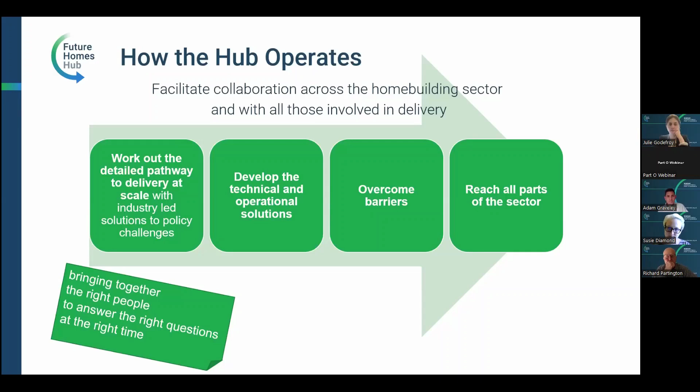The webinar today is an example of how we've done that. We're reaching out now to the sector, and I want to acknowledge not only the speakers today, who are experts in the field of overheating and really pulled together the guidance over the last several months, but also the steering group behind them, supported by our sponsors, Velux, the Mineral Products Association, and the NHBC Foundation, who make this possible.

Also to introduce our speakers: firstly you'll hear from Susie Diamond. She was the lead author for CIBSE TM59, the methodology for overheating risk in homes, and also the Good Homes Alliance overheating risk tool, which is going to be updated, launching next week I think. She'll go through some of the technical and compliance aspects and introduce the guidance we've put out there, to help you understand what it is and how to best use it.

Next speaking will be Richard Partington from Studio Partington. Richard's been working on low energy design practice, research and policy work for the last 10 years. Previously also a member of the Zero Carbon Hub, he was on the steering group for this Future Homes Hub Part O project. Richard will look at some of the more practical design aspects and what the impacts on new homes are likely to be.

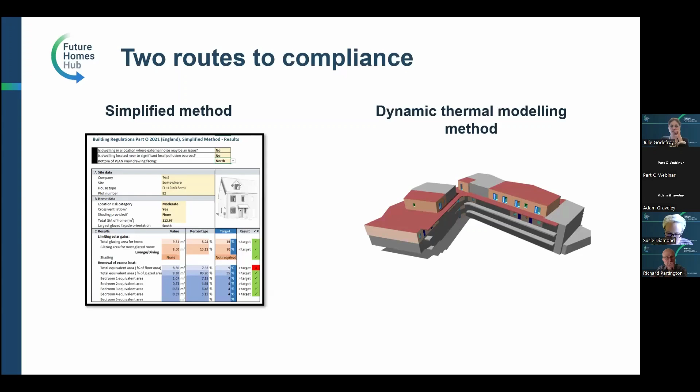Key things to bear in mind, also to think about right from the get-go: there are some key recommendations around designing to mitigate overheating risk, to make sure that's brought down to a manageable level. One of the key things in regards to Part O is to bear it in mind early. There are a lot of considerations that it will have a bearing on, that if you don't look at early and understand and make sure you're compliant with, could mean return to planning.

A lot of these things will affect the facade, so what a building looks like in terms of glazing areas in particular and window configurations. If those aren't taken into consideration really early on, it could cause you a lot of pain further down the road. Our best advice is to test archetypes as soon as possible. So if you've got some standard house types that you build regularly, have a look at those, make sure they comply, and think about what you might do if they don't in certain situations, in higher noise areas or warmer parts of the country.

Think really hard about maximising the opportunity for dual aspect ventilation. There's all sorts of positive reasons why that is a big one in terms of limiting and reducing overheating risk, from the fact that it enables cross ventilation and a much greater potential for ventilation through a property than having the windows all on one side. We know single aspect is a really high risk, again because you don't get the cross ventilation and because you're receiving all the solar gain at the same time of day. So that boosts it at that time of day, and that triggers overheating risk.

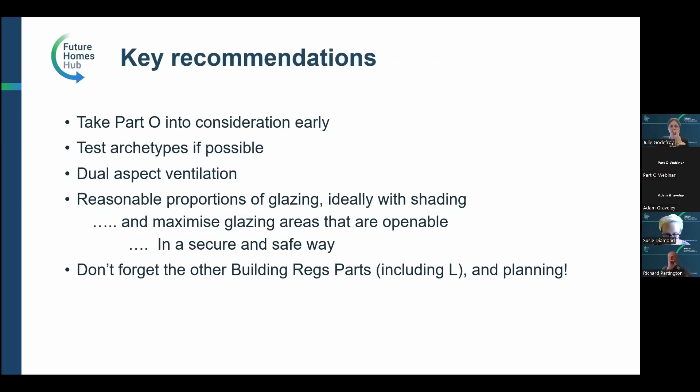So this is what we're going to cover in terms of the technical guidance. This is the main contents that the technical guide includes, starting with the overview.

As I said, the key things: there is a simplified and dynamic thermal modelling route that assesses the overheating risk itself. But on top of that, there are criteria around nighttime noise, security and safety, including falling and entrapment, which have to be addressed regardless of which route you're following. We've got more slides ahead on those, and it's really important that you're aware they apply no matter what other route you're following—they are requirements that you need to meet.

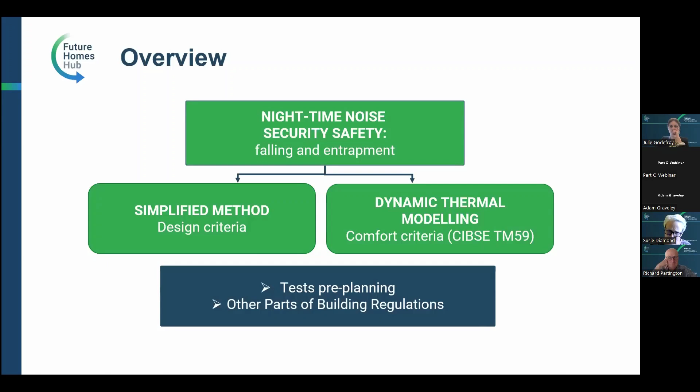Then, thinking about the timeline, the technical guidance covers this in a lot more detail. Pre-project, at an early stage, think about testing standard units, having a think about how they perform, building a library of preferred solutions so that you know what you might go to as soon as there is some non-compliance showing up, and how you might prioritise depending on the severity of that issue.

As soon as you've selected a site, it's highly recommended that you seek advice from an acoustic consultant. If nighttime noise exceeds the criteria within Approved Document O, there are implications, quite significant potentially, depending on how noisy and how much that exceedance is. It's really important you know about it as soon as possible so that you can address it and do something appropriate.

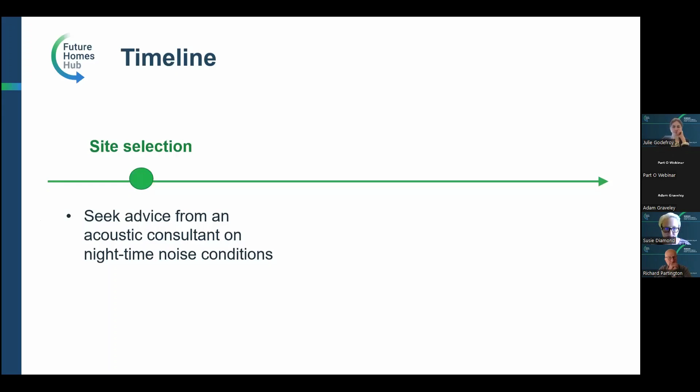Thinking about early stage design up to the planning application, make sure that you've identified whatever passive design opportunities there might be, and that you've agreed the key design principles you want to follow. Agree the design of openings and other features so that they're all settled pre-planning and that they comply with the Part O assessment.

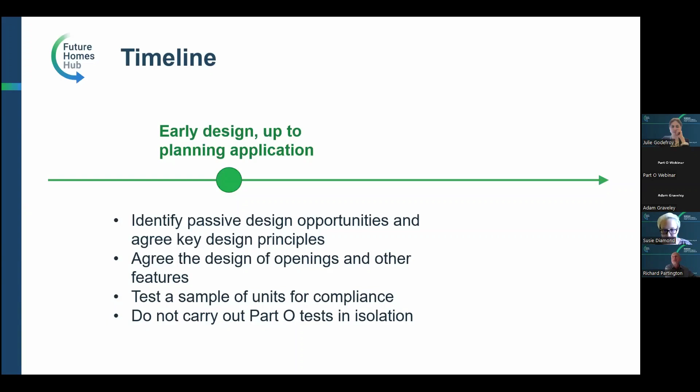You want to make sure that you test at least a good sample of units pre-planning to make sure that they're complying and that you've picked out the ones that are likely to be the worst case, so there are no horrible surprises later down the line. And make sure you're not carrying those out in isolation - that the same criteria are used in Part L and F and other assessments you're doing, so there's consistency.

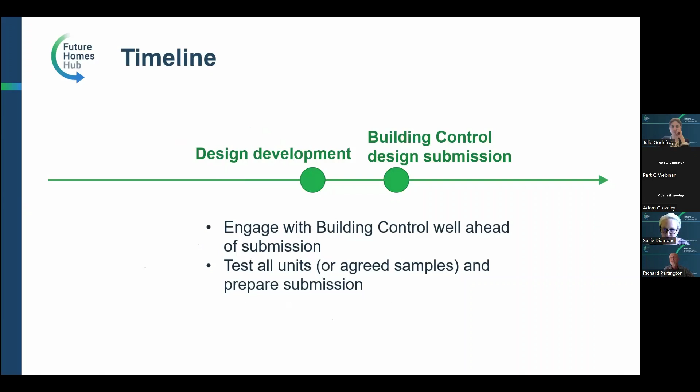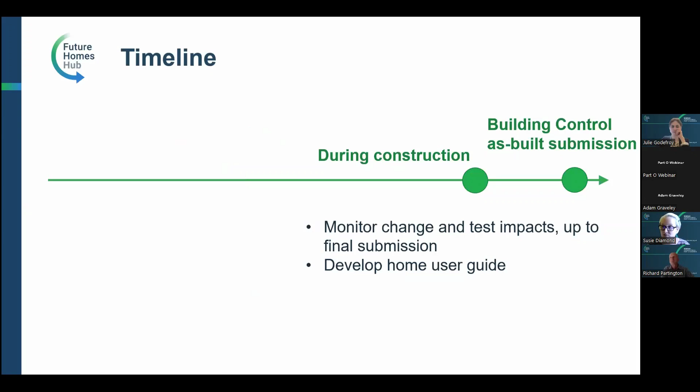Moving on to design development: engage with building control well ahead of submission, checking that they're happy with your approach, the agreed sample you've selected, and the type of submission you're preparing. Then during construction and build, just monitor for any change in tests that could impact on the final submission, making sure everything's still on target. Plus develop the home user guide and any particular information the home users will need to know about how the home is designed to cope in warmer conditions.

Right, I know I'm gabbling, but there's quite a lot to get through. So moving on to the additional Part O requirements - these are outside of the overheating check itself, but are really pertinent and you need to be aware of them. There are noise limits set for bedrooms at night.

I'm not an acoustician, but I understand that those decibel levels are not especially high, so a lot of sites will exceed those criteria. One looks at an averaged rate over the nighttime, and the other looks at peak noise events, requiring that they don't exceed 45 decibels more than 10 times in a night. What I understand is that even just being near a fairly busy road will exceed that - not necessarily being right by a train track or an airport or something we traditionally understand as big noise.

So I think we're going to see a lot more acoustic advice sought. The good news is that the Association of Noise Consultants and the IOA have together written some really helpful guidance to their community, so acousticians are getting up to speed on what is required for this, and it should be fairly straightforward to procure an assessment.

Passive solutions are often still possible if those bedroom nighttime noise levels are exceeded. It depends how much they're exceeded by, how much is possible passively. If those exceedances are more significant, then it's likely that you may need to close all the windows tightly at night and move to mechanical ventilation or cooling solutions. However, it's important to notice that's at night, not necessarily during the day. And unless there's another planning issue that prevents the use of opening windows during the day, it's still feasible within Part O to use open windows during the day and then an alternative solution at night to address the noise criteria.

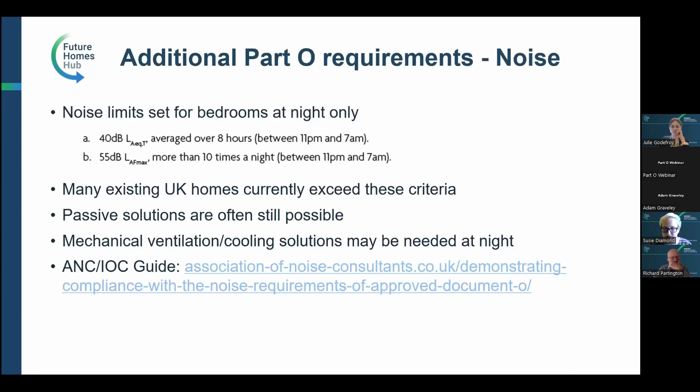I think it is a real benefit to occupants if you live on the ground floor to be able to feel comfortable leaving your windows open at night when you're sleeping. It's obviously a lot more pleasant, and obviously alarming if you don't feel safe in that scenario. So I think this is a positive, but there will be some challenges around achieving that in some circumstances.

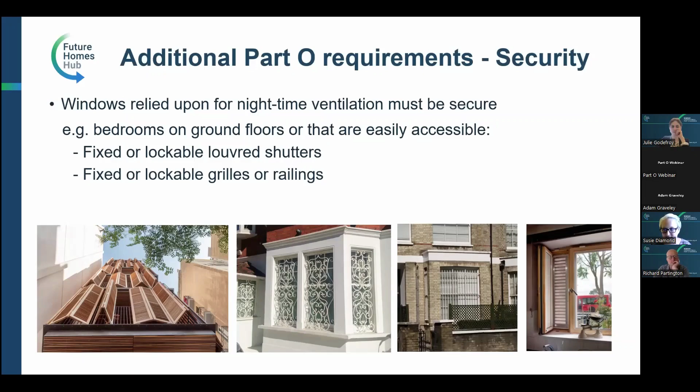An additional key requirement is the protection from falling and safety requirements. Now these supersede those in Part K, they're additional requirements, and they set out a maximum reach on opening windows of 650 millimeters from the inside face of the internal wall. So that's not a limit on how wide windows are able to open, but it's a limit on how wide you can take account of them being open in the Part O calculation.

And that's quite a subtle distinction, I know, but it means you don't have to put limiters, for example, that prevent them opening more than 650 mils, but you can't take account of any ventilation that is produced if they're wider open than that. So the good news is that the rather magic spreadsheet that has been prepared by the Future Homes Hub will take account of that and make sure that that limit isn't exceeded.

The other one is on sill heights, and the requirement is that sill heights should be higher than 1100 millimeters. That means that restrictors shouldn't be required because the sills are higher than people can fall out of. But we're also conscious that there is a maximum sill height for windows that are a means of escape of 1100 millimeters. So there has been a small tolerance of 100 mils below the 1100 in Part O. This is all explained in the guidance, I promise you.

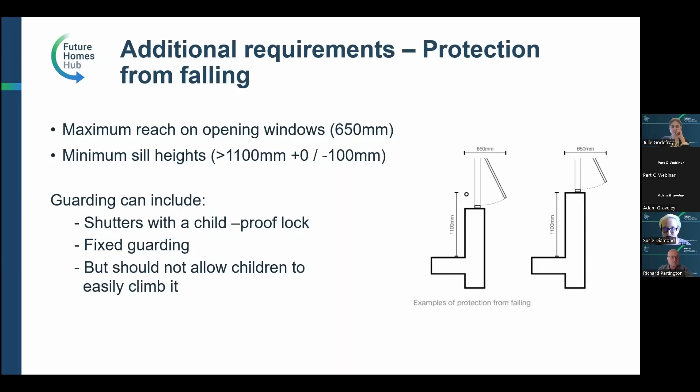I know it's fiddly, but it is important to be aware of because a lot of standard window designs, and this again is upper floor windows, not ground floor, but any upper floor windows will need to be mindful of these two requirements, which could be quite significant. So bringing your attention to those, and there is a lot more advice around these in the guidance.

So moving on to the nitty-gritty of the actual overheating checks, two methods. The simplified method. Now, this is a bit of a misnomer because it's not nearly as simple as it sounds, or it should be, in my opinion. We've created a flowchart that guides you through the approved document and all the requirements that it lists out. It essentially asks you to set the targets. You determine what your targets are based on some characteristics of the home, and then you assess whether or not you're meeting those targets.

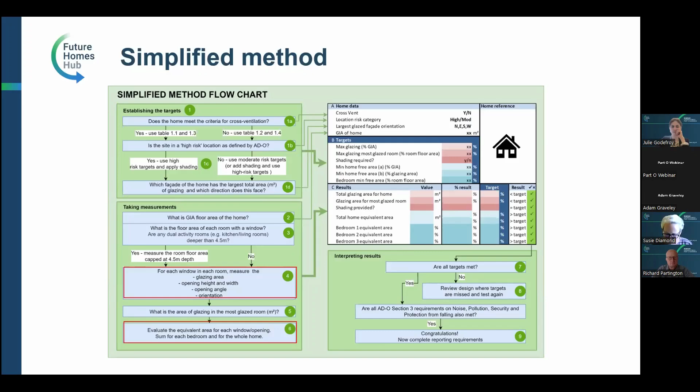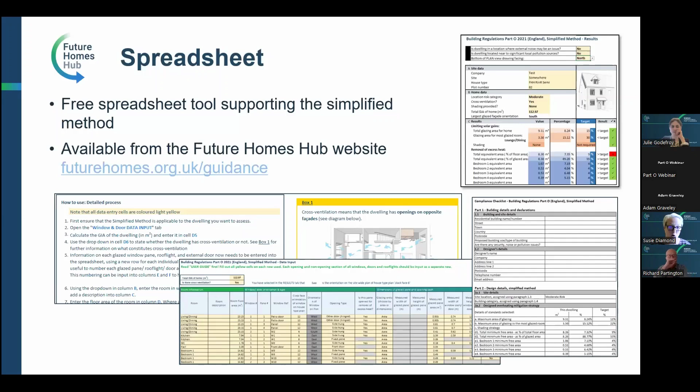So it's a little bit of an involved process, but the good news is there is this free spreadsheet tool that the marvelous Tessa Herstein, I think, has had a lot to do with, and I've got a few screenshots there. You can download it for free from the Future Homes Hub website, and that takes you step by step through this process and helps a lot with the error checking and making sure that you're doing it in the right way. So what you end up having to do is the measurement side, so there's no escaping that.

Oh, and a key aspect of the simplified method is that you do need to assess every single unit on a scheme. So it's not done on a type basis or a sample basis. You do need to do every single unit because every unit might have a different orientation and a different configuration. So I guess if you've got exactly identical units facing the same way, you could copy and paste, but be mindful of that. So you need to take measurements for the glazed area of every window pane.

So that excludes the frame and is just purely the glazing. The width and height of the opening, so that does include some of the frame. The floor area for each occupied room, the gross internal area of the whole home, and then the equivalent areas, which is the ventilation area, effectively, is calculated by the spreadsheet. So that's good news, because that's a fiddly one.

Is that everything I need to say? Oh yes, and the spreadsheet will also work out what your targets are and whether you're passing or failing against each one, and give you a nice little printout of how that unit performs, so that you can identify any areas where you need to do some extra work. So that processing of the results is also a really key feature and a really helpful inclusion in the tool.

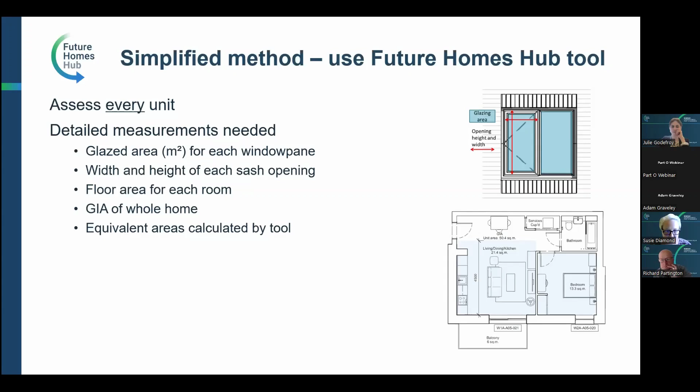So moving on to the dynamic modelling method. So the change here is that you only need to assess a sample set of units. So your modeler can help you assess what a reasonable sample might be, a representative sample that would include those likely to be at the most risk of overheating.

The method follows the CIBSE TM59 methodology, which I was an author for, so I do know quite a lot about. But that sets quite a clear process that modelers need to follow. There are two key criteria within CIBSE TM59.

Sorry, I know I'm gabbling.

One based on adaptive thermal comfort that looks at all occupied rooms, and the second that looks at bedroom temperatures at night. So, you know, there is a similarity with the simplified method in that respect. Your modeler should be able to give you some commentary on spaces that don't meet those criteria.

So this is the way I present my results in the box at the bottom, so you can see where the exceedance is coming in, the numbers that are going red, and it highlights the rooms in which fails are occurring, so that you can identify the cause behind that and what mitigations might be appropriate to improve the design to the point where you do pass.

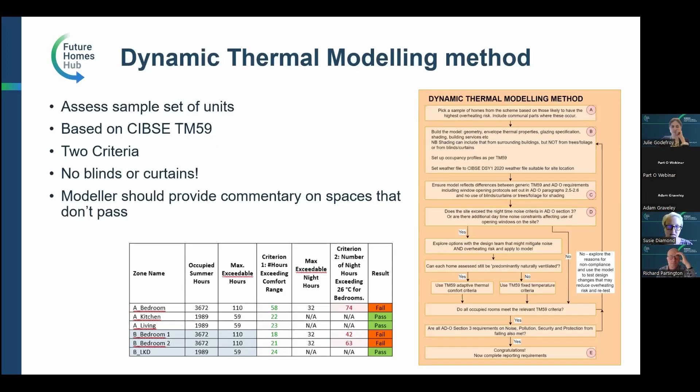One key thing to bear in mind, I think this might be on the next slide as well, is that blinds and curtains are not allowed to be included in the TM59 assessment under Part O. They used to be under the TM59 CIBSE method, but that's quite a big one, because that often made quite a big difference, particularly in city centres.

I'm thinking London particularly. One of the big advantages of the dynamic thermal modelling method is it takes into account the location in more detail than the simplified method, which only looks at central London and the rest of the country. Essentially, there are some small bits of Manchester that it counts as high risk, but weather data actually varies quite considerably from one end of England to the other,

and therefore if you are building on a site in the northeast, for example, you're likely to have a lot cooler microclimate than if you're building in Guildford. So the dynamic thermal modelling method, because it picks a weather file closer to your site, does enable that to be reflected, and wind speeds and air temperatures and solar gain all reflect that local climate in a bit more detail.

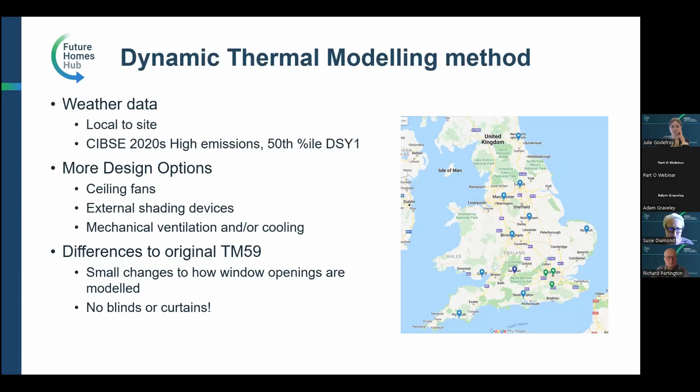The modelling method also enables you to take more design options into consideration. So it looks at ceiling fans, for example, external shading devices, and will allow you to take into account mechanical ventilation. So this is the method that you need to use if noise levels are exceeded. Mechanical ventilation at night, and or potentially mechanical cooling if that's absolutely necessary. I think I've covered the differences to the original TM59.

So whichever method that you follow, there are reporting requirements. I know I'm running out of time. There is a compliance checklist within the approved document, and a lot of that's been replicated in the spreadsheet tool that the hub's produced, and that gets filled in for the simplified method if that's the route you're following. If you use the dynamic modelling method, then a full modelling report will be required to be submitted, and your modeller can help with that.

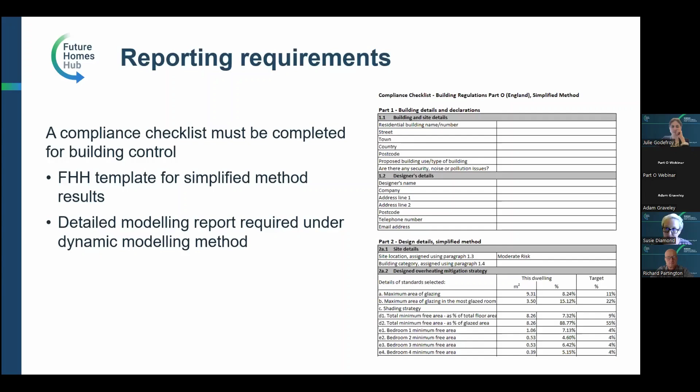In terms of the rest of the guidance, it also includes some basic good practice principles, which I think I covered some of earlier on, about designing for limiting overheating risk. It includes some detailed worked examples following a project through both the simplified and the dynamic modelling route, to show how that works through. And it also has 4 case studies looking at different scenarios and how they were enabled to comply with the approved document.

For additional resources, just in case these are useful for you, DLUHC have put together a list of FAQs that give additional information on the questions that a lot of people have been asking about the approved document. So they're published on the DLUHC website, and there's a link there.

The Good Homes Alliance: Julie and I wrote for the Good Homes Alliance a few years ago now a one-page tool for new build homes, which gives some really early indicators and some broad brush themes about where overheating risk comes from and what the appropriate mitigations are in different scenarios, and what might help to better design homes that don't overheat. And very recently, Julie in particular has been putting together a retrofit version of the same tool, which is a bit more detailed and aimed at existing homes and retrofit, the launch for which is next week.

I mentioned earlier the acoustic guidance has come out, and also there's a reference to TM59, which you might need to swot up on, although your modeler should be fully aware of all this. It's the advantage of employing an experienced modeler. I can take you through all that.

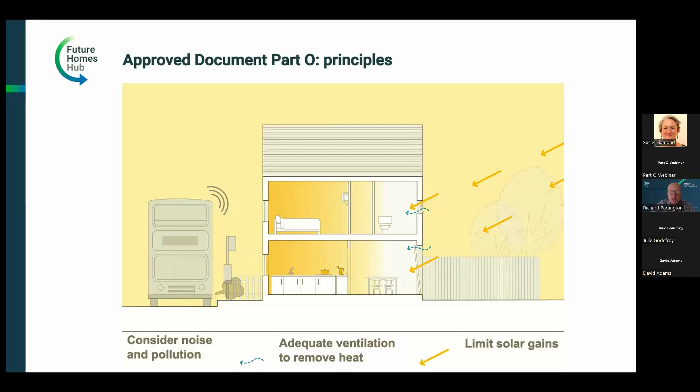The second thing is it's encouraging us to improve the ventilation in homes, and especially on the bedroom floor, because it's likely that at nighttime during sleep, occupants of a home are likely to most feel the adverse effects of overheating. And then the final series of things that Part O is asking us to do, and this is very unusual because it's the first time in the building regulations really, is it's asking us to think about the context of the home. So a home that's designed to work in the middle of a green field might not necessarily work in the same way in terms of Part O if it's on the edge of a site next to a railway line or a motorway. And with the encouragement to improve ventilation, there are all the considerations about how you make that ventilation safe, which Susie has described.

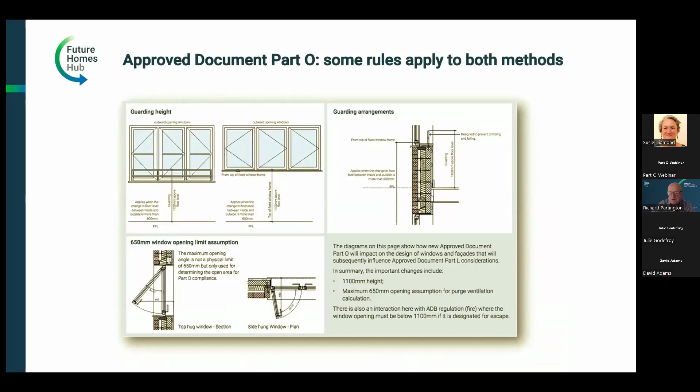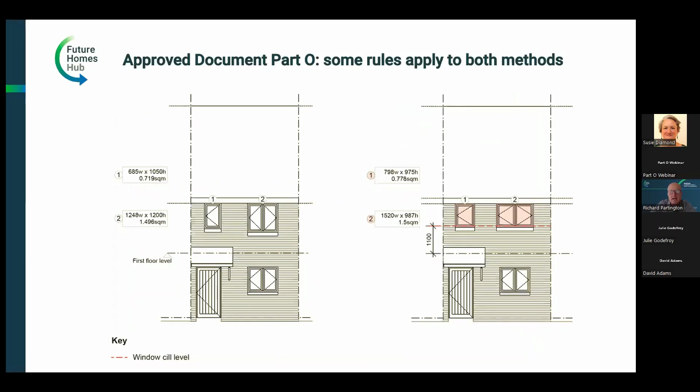And the one that has most obviously stuck out as a change to the way we design, and it's something we encountered actually when we first started to look at Part L for the Future Homes Hub, is the limitation, and it applies whichever method you use to demonstrate compliance, the limitation and constraints on the way that windows are designed on the first floor bedroom. So this business of the 1100 guarding. And what we found generally in the modeling work is that on the whole, upper floor windows, we needed to make sure that there was enough ventilation and the ventilation area of the window was sufficient. And so the likelihood is the proportion of windows on first floors are going to change. Because of the 1100 sill, the window will be wider and the window will be less deep.

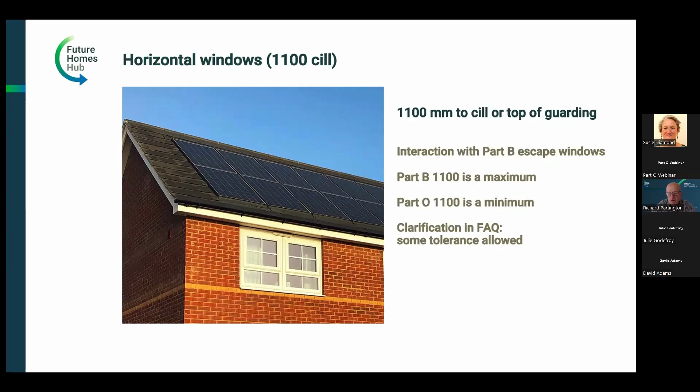Of course, there may be other clever ways around the requirement, for instance, having a fixed panel of glazing below an opening window. But the way Part O would see this doesn't necessarily help the designer. So the fixed panel is letting the sun in, causing solar gains, and the upper panel is reduced in area, so it's reducing the ventilation. So it needs quite a lot of trial and error, whichever tool you use, to try and work out the best combination of balancing those two requirements, limiting overheating and improving ventilation.

One of the great things about the guidance that the Future Homes Hub has issued is that there are, in section 8, a series of case studies where you can see how an existing house design has been transformed or modified by applying either of the tools, the simplified method or the dynamic TM59 method.

It begins to give you an idea of where there will be some design flexibility, and where, in the case of the simplified tool, it's a rather crude application of some simple principles that sort of leads you more towards reducing window areas.

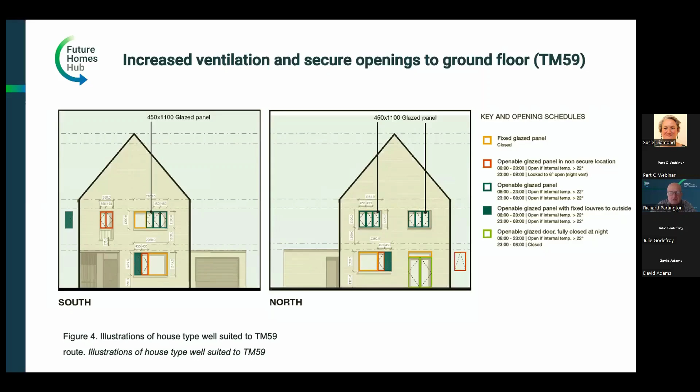This is an example of where TM59 has been applied. You can see it allows you to analyze the opening of different openings within the home with different characteristics. For instance, opening vents that open a certain amount during nighttime, doors that can only open during the day and not during the night, and then windows with louvers on the outside.

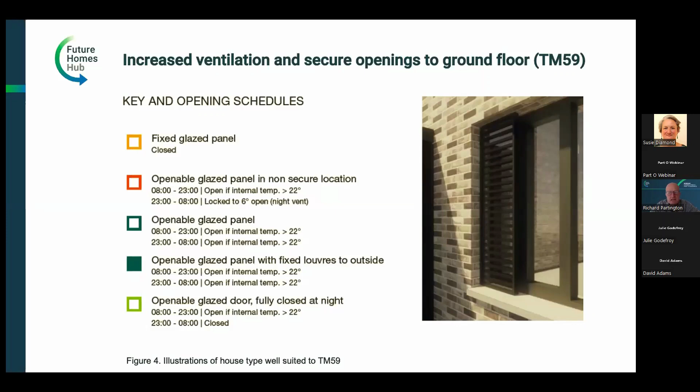TM59 is probably the likely route if you're wanting to apply some design flexibility and take the view that window areas and internal daylighting, for instance, might be a priority, and mitigation has to be applied through a more sophisticated design route. I think our conclusion from the work we've done so far is that if you adopt the dynamic thermal modeling TM59 route, you should see that really as part of the design process.

It shouldn't be just seen as a compliance check, because there's lots of useful information that comes out of doing the model that helps inform the design process.

One of the things I think we will see are more instances of shading and external guarding. And Susie mentioned the difficult problem you have on a ground floor, especially where you've got bedrooms, of providing enough security. But this is also going to introduce quite a significant cultural shift. In Europe, you often see external shading, and of course the shuttered traditional Mediterranean homes on the cover of the TM59 guide are absolutely a vernacular response to a hot climate.

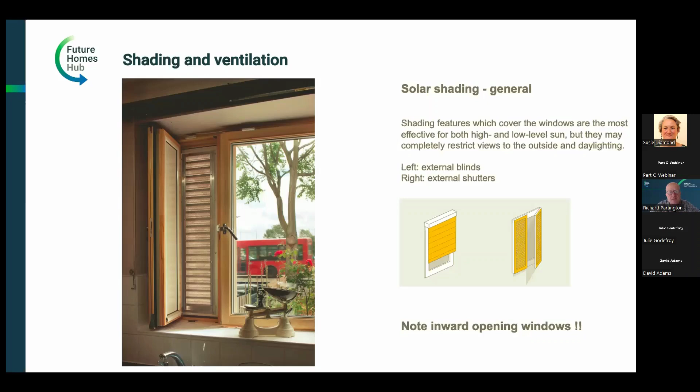But of course, it means that all of the windows open inwards. So our obsession with curtains and decorations on windowsills and things is going to be slightly limited if this is the approach. There are various mechanisms for dealing with the difficult-to-deal-with east and west sun, where the sun angle is low.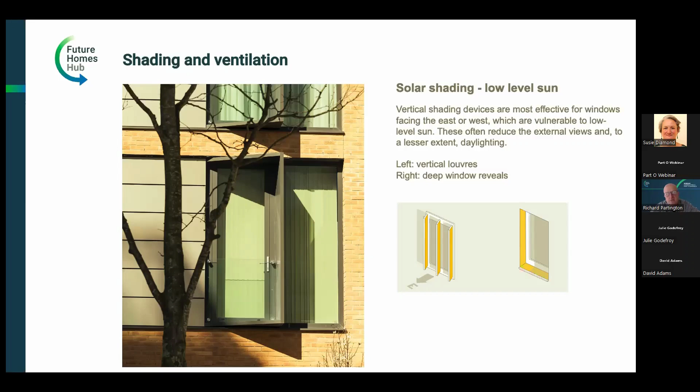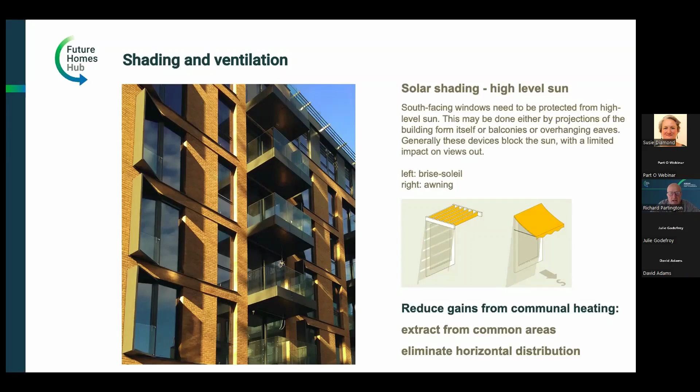That's a little bit easier to comprehend, and certainly easier to control, is south-facing sun. So projecting balconies that project out to about the depth of the window, in other words cutting off sun at an angle of around 50 degrees, can deal with the highest level of sun in summer. So you can have a projecting balcony or a projecting shade that allows some useful winter solar gains, but also keeps out the unwanted sun in the summertime.

So now here's an example of what we discovered when we applied the simplified method to some dual aspect apartments. This is in London, so high risk, but dual aspects, so potential for good ventilation. You can see on the left here the elevation of a 3-floor walk-up maisonette building with a bedroom on the right-hand side, a large fixed panel and opening vent, and then a living room with a fixed panel and opening doors.

And to get this to comply with the simplified method, you see there's quite a significant reduction in the glazing area. So an increase in the ventilation to the bedroom, but overall a decrease in the glazing area to reduce the solar gains. Quite a substantial change.

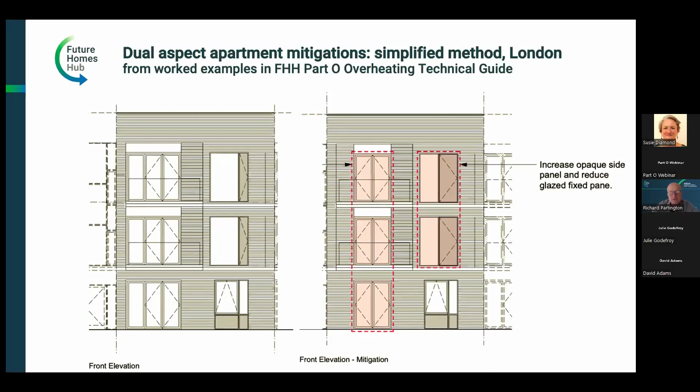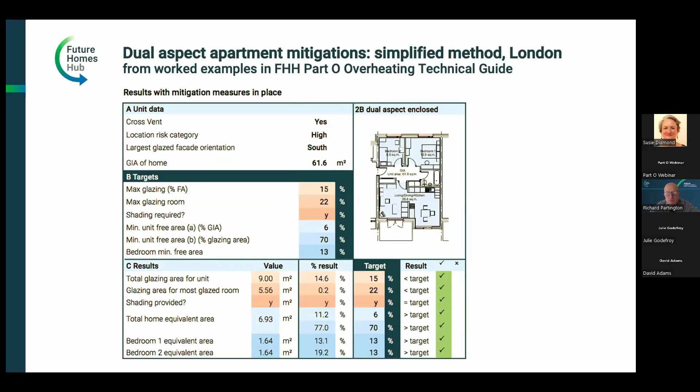And this is the output from the tool, the spreadsheet tool. So you get an idea of where, having put all of the input data in, the vulnerable rooms are, or the facades that are causing a problem, or the areas of glazing in the specific rooms. And of course there are more sophisticated ways of tackling that problem. So if the design priority was to keep that amount of glazing, then for instance the balconies, as in this design, can be partially enclosed.

But then there are issues to do with communicating to residents how these sort of devices are used. So something like a winter garden here in wintertime, if it's sealed up, it protects the home from quite an exposed site, makes the winter garden and the balcony more usable during the winter. But in the summer, the whole thing has to be opened up to ensure that you can achieve the necessary ventilation. And that modeling can only really be done by somebody who's used to dynamic thermal modeling and understands the criteria being applied and the impact of different changes.

So here's an example from our own work, a project completed some 10 years ago with Barratt David Wilson Homes. Here we were designing homes with several considerations really, but if you look on the right-hand side, you see large areas of glazing that actually front onto a winter garden.

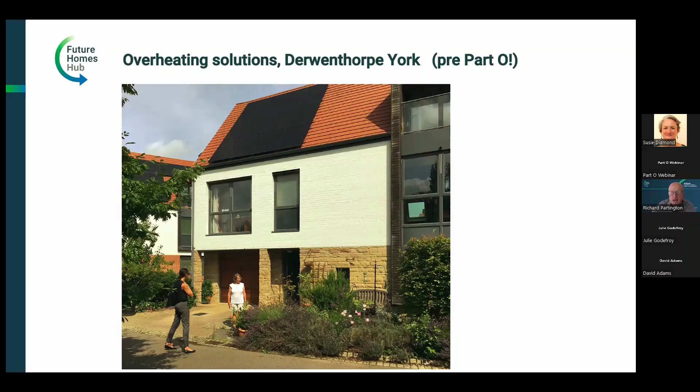And the point of the winter garden is not only to mitigate overheating, it was also to do with introducing some privacy on homes that were very close to a street frontage. So where there was a ground floor living room, having a buffer space. It was a buffer space environmentally, helping with the heat demand in winter. And it was also a device to allow a through-floor lift to be incorporated within the design, so that we could provide for future adaptability and flexibility without putting a lift through the center of the living room and the master bedroom.

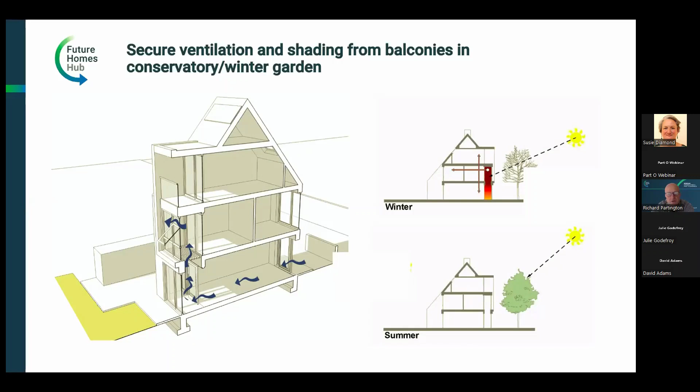But one of the things that it did do, and it's been very successful, is allow for some ventilation to the ground floor, but in a secure way. So the residents can open the first floor windows in the winter garden. The air can move through from the garden space through the first floor and through the ground floor. And those windows can be left in a secure open position when the home's not being occupied. So here you can see the first floor grillage is actually an open mesh. This is providing some shading for the windows below, but it's also providing a method for air to pass through the home.

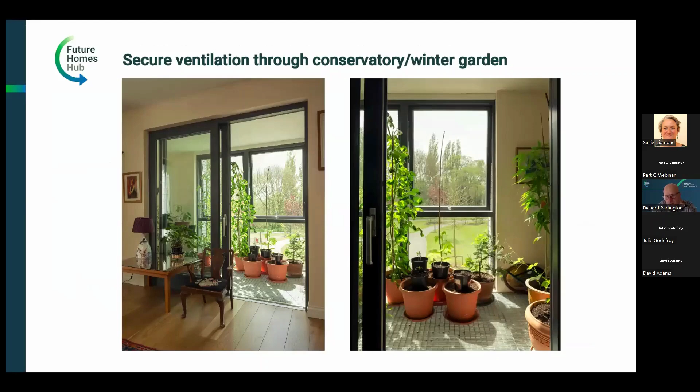So you might think this is quite an elaborate solution really for a problem that could be solved by just reducing the window area. But actually one of the things we've discovered on this project, which we revisit regularly over the whole course of the work - we're now on the 5th phase of a 13-year building program - is that the single thing everybody says who has a home here is that they really appreciate the lightness and the airiness and the spaciousness of the homes. Now, in fact, the homes aren't particularly spacious. They really don't exceed the national standards by very much, but they do have high ceilings and plenty of daylight. So there is a perception of spaciousness.

And I think we need to think about ways of applying Part O and taking the risk of overheating with future climate very seriously, but at the same time trying to preserve some of the attributes of homes, especially in an environment like York where winters are pretty grey and miserable and wet, and the site itself is quite exposed.

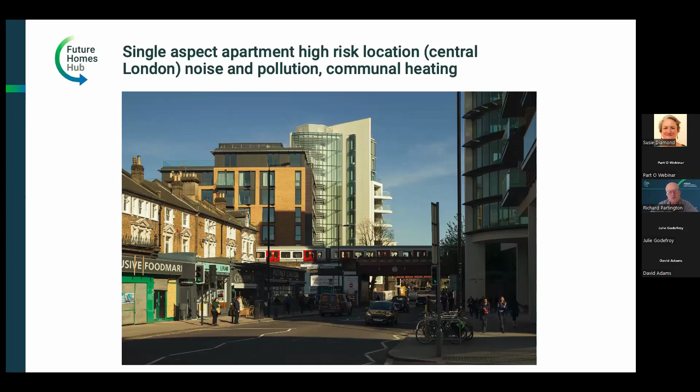So it's noisy, it's potentially polluted, coupled with the fact that we had west-facing facades and we also had single aspect units. So we thought this was a good project to try out some of the modeling tools. And I think you'd agree when you just look at the facade, this is absolutely standard sort of design fare in London in terms of the proportion of glazing and the proportion of brickwork and the kind of design aesthetic.

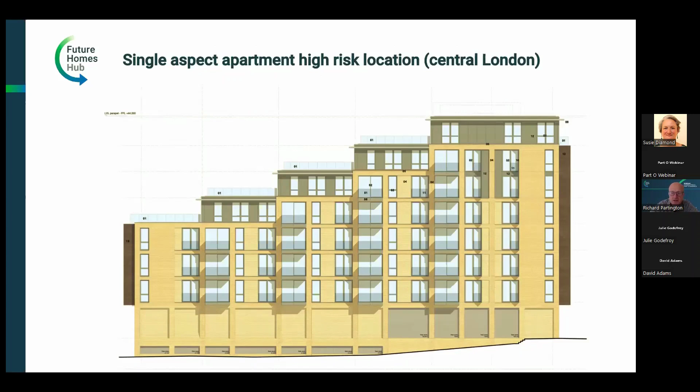The so-called London aesthetic favors largely well-proportioned glazed areas, partly driven by market demand from developers and purchasers for plenty of glazing and good aspect.

Looking at this elevation, you can see a single aspect, 2-bedroom apartment. The master bedroom has double windows, the smaller bedroom has single windows with a fixed vent below, and the living room has a pair of double sliding doors.

Throwing all the tools at our disposal through TM59 at it - this isn't the simplified method, this uses more design flexibility - this is what we end up with. You can see there is a real significant issue on these high-risk sites of how we manage the potential for overheating on certain elevations.

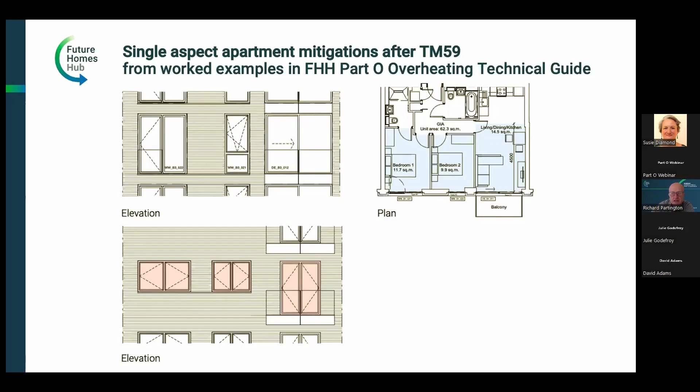One concern for designers is that in urban sites, it's not just external factors like solar gain that cause overheating problems. We also find accumulation of heat inside buildings, especially associated with communal heating systems, and also high occupancy per square meter area, are causing overheating problems.

To mitigate solar gain issues from outside, we need measures like reduction in window areas, reduction in window heights, and a change in the opening mechanism of windows from sliding windows to paired casements, so we can increase ventilation.

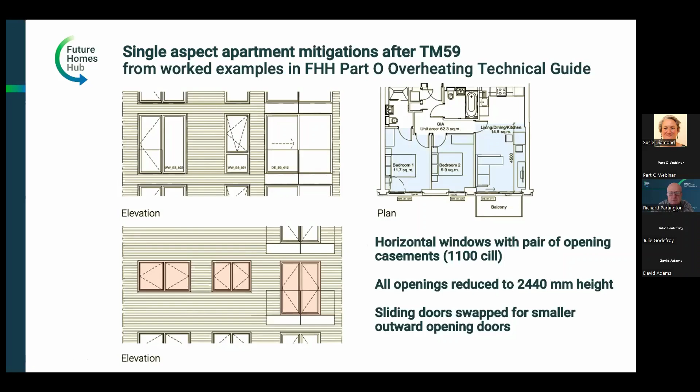I'd suggest that whoever is designing in these urban environments thinks very hard about coupling a ventilation system in common areas with heat distribution. In this building, we have a fire engineered fire strategy, and all corridors and common spaces are mechanically ventilated, with that ventilation system also part of the smoke extract system. The two are quite complementary, because running ventilation during summer is a good safeguard to make sure that in a fire condition, all the extract systems are working efficiently.

In other projects in the practice where we don't have the benefit of that fire engineered solution, we've pretty much outlawed any horizontal distribution of hot water pipework. So we're distributing hot water for heating and domestic use much the same way as you would in a hotel, running vertical risers with paired apartments, avoiding accumulation of heat in common areas and corridors.

My final thoughts are about where we might end up when Part O is applied. The reason for showing you the Derwenthorpe houses and that rather elaborate winter garden is really in hope that the response from designers and developers is not to just look at a house type, look at the worst condition - the most glazing facing west - and design a solution with smaller windows just to satisfy that criteria. That seems to be part of the solution to overheating, but not part of the solution to providing generous, well-proportioned, spacious homes that people like.

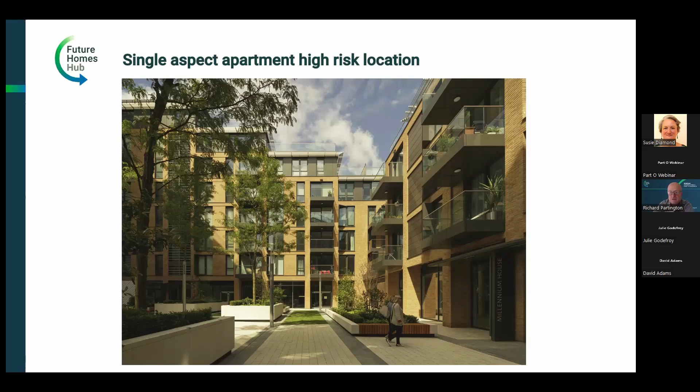That's a very common requirement in dense urban development. We want to make sure homes on the lower floors are getting sufficient daylight and have a view of the sky. That is in direct conflict with the impulse from Part O to reduce glazing area. So how will that be solved?

One fear, partly because of the slightly uncertain wording of the guidance in Part O, is that developers will resort to mechanical cooling very early on because they can't balance all the things - daylight, sunlight, solar gains, noise, pollution, mechanical vent. You could end up with a lot of active cooling systems, and that's completely the opposite of where we want to be in dense urban development.

If you're applying active cooling, you're taking heat out of some buildings and dumping it into the air in the immediate environment near other buildings, increasing the propensity for the urban heat island effect to happen in city centres.

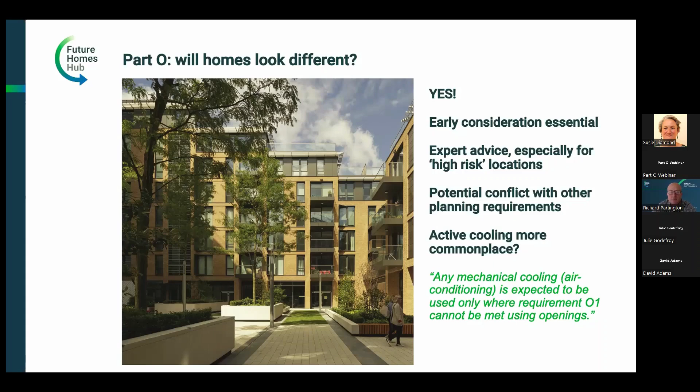So I think there are some real challenges, and I can see in the chat there are already lots of questions about clarifications that have arisen. You'll see in the presentations, and especially in the guidance, wherever there has been a clarification from DLUHC, we've tried to answer that with a direct reference to the FAQ. But the fact that there are so many questions generated means it's going to be a while until we understand how to apply Part O and what the implications will be.